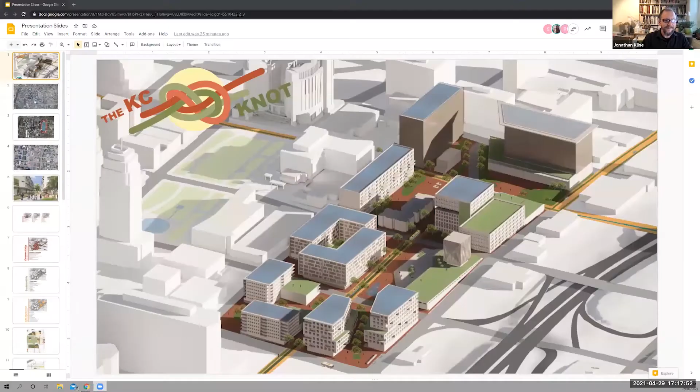As Jonathan and Valentina mentioned, on January 11th, the first day of the 2-week competition period, we attended a kickoff webinar where the competition site was announced. After the webinar concluded, we were sent a 30-page competition brief with tons of information and links about the history and current issues facing the host city, the site topography and challenges, and specific goals and deliverables for the competition. This year's ULI Hines host city was Kansas City, Missouri.

Like most American cities, Kansas City succumbed to suburbanization and white flight in the 1950s and 60s, resulting in population loss and urban sprawl. This legacy lives on as Kansas City is famously one of the least dense cities in America. Over the last 20 years, Kansas City has experienced a renaissance with a thriving arts scene, growing entrepreneurial ecosystem, and winning sports teams.

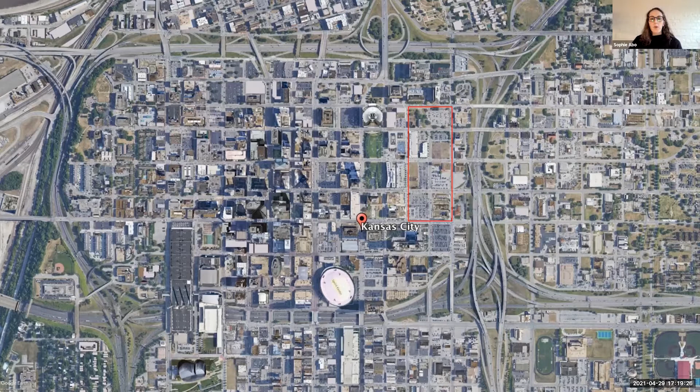Kansas City's central business district, pictured here, is surrounded by several highways, and together these highways define the downtown loop. The competition site was in the eastern part of the downtown loop, adjacent to the government center and financial districts. The neighborhood is loosely referred to as the East Village.

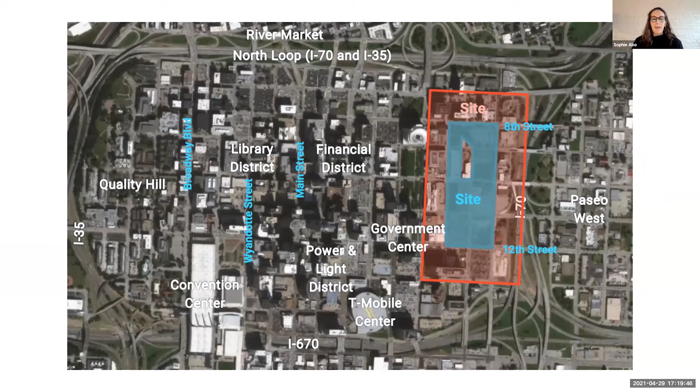The competition site consisted of 8 city blocks, or approximately 16.2 acres of land. Zooming in on the site, you can see that most of the land is currently used as surface parking lots. There's one existing apartment complex embedded in the site, but for the most part, there are very few people living in the East Village right now.

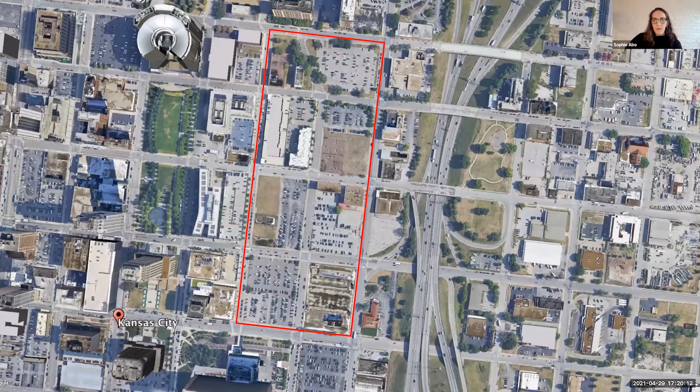The goal of the competition was to provide a comprehensive vision and proposal to transform that site into a thriving, mixed-use, mixed-income neighborhood. We were challenged to understand the social, demographic, political, and economic forces shaping Kansas City today. We had to analyze the competition site, determine a market-supported redevelopment plan, and propose an urban design scheme for the study area. We were required to create a market-feasible development program and pro forma, determine relevant subsidies, as well as a return on the entire project.

This year, ULI judges were looking for proposals that would catalyze regional and local economic impacts, increase sustainability and resilience, consider issues of equity and housing affordability, and challenge current assumptions about parking and automobile-oriented development.

As a team, we dove into that dense competition brief and other resources to understand the history and context of the site in Kansas City. We identified industry clusters, gaps in housing and business services, strategic partners, and market feasible concepts.

During our research, we identified a demonstrated need for wet lab office space in the city. We also found that demand for wet lab office space is projected to continue to grow after the pandemic. So building off of this unique real estate need and Kansas City's agricultural history and further site analysis, we centered our project concept on 3 central pillars: connectivity, transit-oriented community, and then life sciences, past, present, and future.

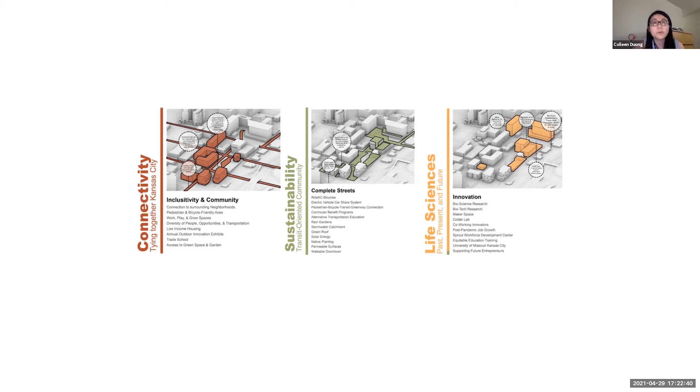The first pillar is connectivity. As mentioned, the study area is an urban island that is surrounded by multi-lane highways that separate distinct neighborhoods and communities in Kansas City from its urban core.

The KC Knot seeks to create connections between the East Village, Paseo West, Columbus Heights, Downtown, and East Crossroads and Hospital Hill neighborhoods to help mend this fractured urban fabric that was created through automobile-oriented redevelopment and redlining over the years.

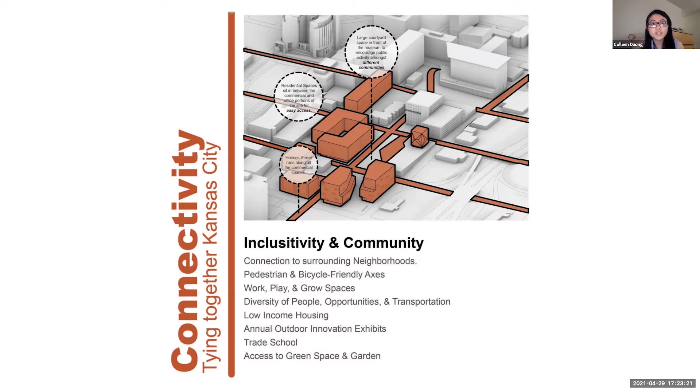This idea is tied together by a series of pedestrian and bicycle-friendly axes and mixed-income housing to create a vibrant common ground for the communities of Kansas City to live, work, play, and grow together as one.

The second pillar is creating a sustainable transit-oriented community. Across the street to the south of our site is the newly constructed East Village Transit Center that begins to encourage the use of public transportation through the city.

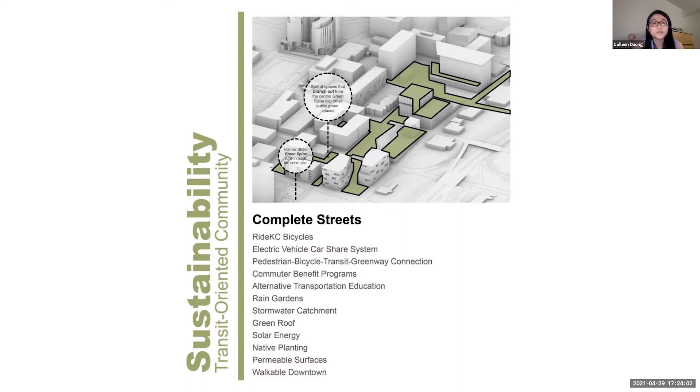The KC Knot challenges historical automobile-centric norms through a new transit-oriented design and development. We plan to limit underground automobile parking to incentivize visitors, employees, and residents to choose alternative modes of transportation when traveling to and from the site. With this idea, we plan to design a pedestrian and cyclist pathway to encourage an alternate mode of transportation outside of automobile use. The third and last pillar is a focus on life sciences.

Kansas City has a history of acting as America's AG Tech and animal health corridor with a focus on life science innovation. We hope to enhance this strong history with life sciences by creating new job opportunities, especially with post-pandemic job growth, in partnership with existing organizations in Kansas City, such as the Sprout Workforce Development Center, to create these new opportunities and train residents from neighboring communities in these new roles, and with the University of Missouri, Kansas City's Office of Technology Commercialization to support university-affiliated entrepreneurs and academics in this field of research.

With these ideas, the KC Knot hopes to act as a life science cluster to support economic transformation and equitable learning and job growth opportunities. These are the three pillars that we focused on when we began to design and organize our project development, which Doris will be talking about now.

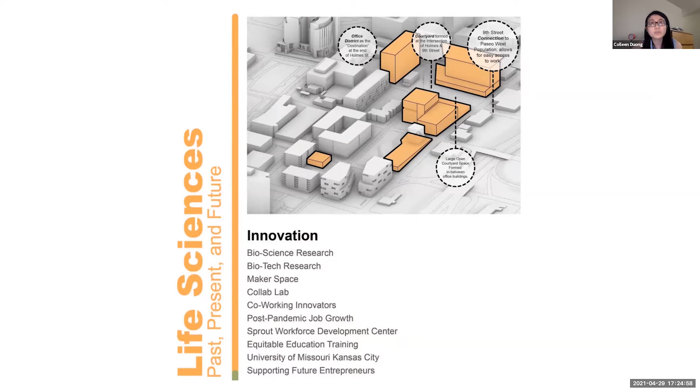The study area is currently an urban island surrounded by multi-lane highways that separate distinct neighborhoods and communities of Kansas City from its urban core. Kansas City's historical policies and past urban planning have created fractured urban fabric through automobile-oriented development and redlining.

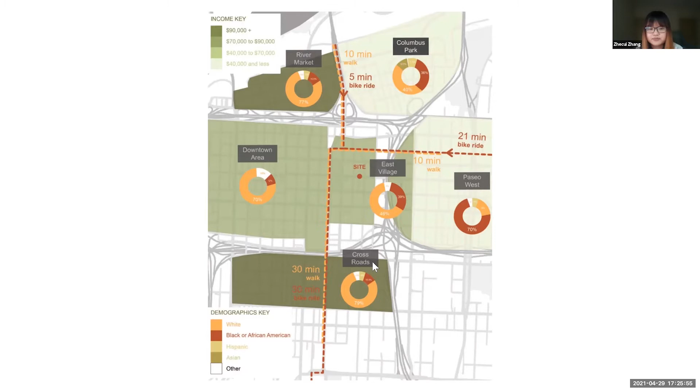The donut shows the composition of the population. We found that Columbus and Paseo West neighborhood have very different demographic characteristics and income levels compared to the neighborhoods to the west side. These two neighborhoods have a higher percentage of African American residents and the income level is lower. Our site sits in between the more wealthy neighborhoods and the lower income neighborhoods, which could potentially tie those two neighborhoods with different characteristics together.

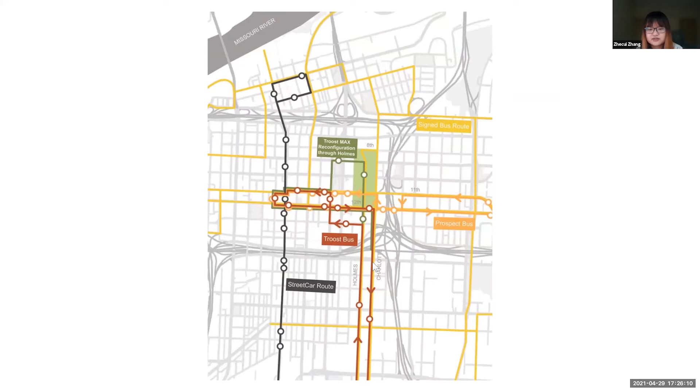There are multiple lines of public transit connecting our site to surrounding neighborhoods. There is also a new bus center to the south of the site. They are quite underused for now, but we see it as an opportunity for transit-oriented development.

When beginning our design, we started by studying the surrounding sites and gaining an impression of the community of these sites and the feeling of them so that we wouldn't design a development that was completely foreign to the surrounding neighborhoods. For example, when studying the downtown area, which is directly to our site, we noticed that it was a dense urban development with a large population of largely younger residents that were potentially in the tech industry.

And while studying Paseo West, the neighborhood directly to the east of our site across the highway, we noticed that it was a low density urban outskirt with large families that had little income. We wanted to design a development that transitioned from a highly dense neighborhood to the low dense neighborhood, offering opportunities for both communities.

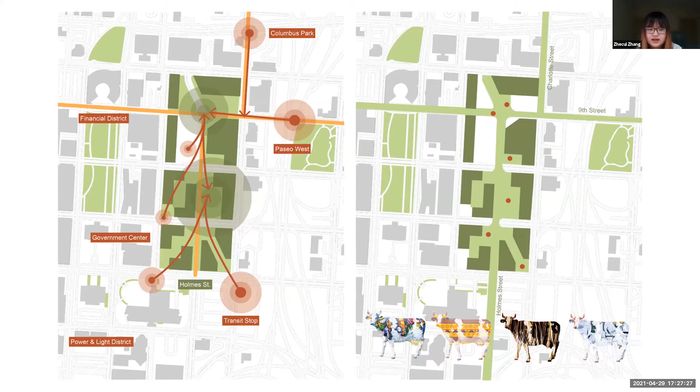The KC Knot seeks to create better connection to the surrounding neighborhoods. Majority of the people would come to the site from Paseo West neighborhood and the new transit center, along with other entry points to the KC Knot. Those entrances generate two major points of interaction, and that's where the main public spaces of the project will be.

There is a series of public spaces in front of the buildings, creating a green spine connecting the sites, and a series of cow statues will be placed along the green spine to capture the history of Kansas City. 9th Street, Holmes Street, and Charlotte Street are the main axes of the site.

Those three streets will be renovated to challenge historical automobile-centric norms through pedestrian and cyclist-friendly as well as transit-oriented design development. The Holmes Greenway runs along the spine of the KC Knot, connecting historically disenfranchised eastern neighborhoods with job opportunities via the 9th and Charlotte Street bike arterials.

The entrance to the KC Knot sits diagonally from the new transit center and hosts a multimodal hub with RideKC bicycles and a drop-off zone for transportation network companies.

When we were designing this, we brainstormed what kinds of people would actually use and come to this development. The photos to the left of the site plan are the types of people we wanted to attract to the KC Knot. For example, people from Paseo West will come to business incubators to work towards opening up their own shops, or come to the Workforce Development Center for job training.

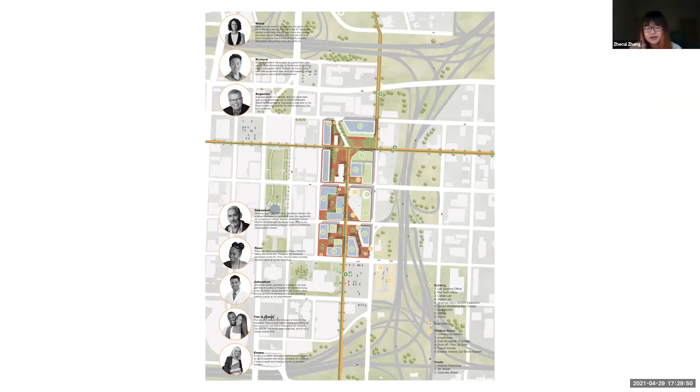As Doris mentioned, a major part of our project was the development of a greenway along Holmes Street, which created a vital network connecting East Village to the adjacent neighborhood of Crossroads over the 670 highway.

This is what we refer to as the green spine of our project that connects the multiple green spaces branching off of Holmes Street. The following slide showcases a study of how to adjust the existing street dimensions to accommodate cyclists, allow for public transit access, and give generous amounts of space to pedestrians.

The green spine is a carless street that promotes sustainable transit and allows the freedom for more pedestrian movement.

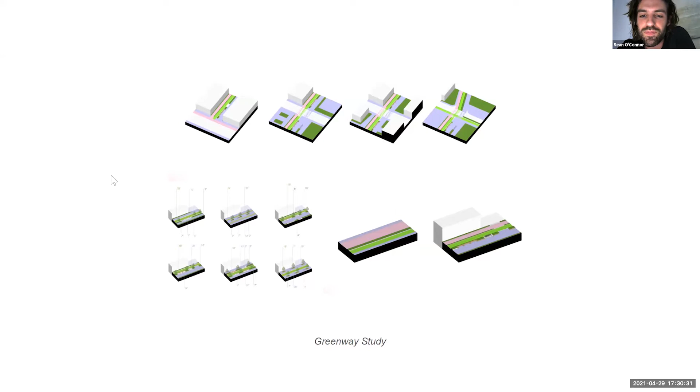The results of our study create a promenade for pedestrians and cyclists while allowing for bus access. We expanded the sidewalk 6 feet on the west side and 18 feet on the east side to welcome the circulation of pedestrians. A two-way bike lane stretches across the street and links with 9th Street, leading to an axis linking Paseo West and downtown.

And Charlotte Street, which links to the adjacent neighborhood of Columbus Park. The Greenway's bus lane connects with existing bus schedules, easily connecting it to the rest of the city.

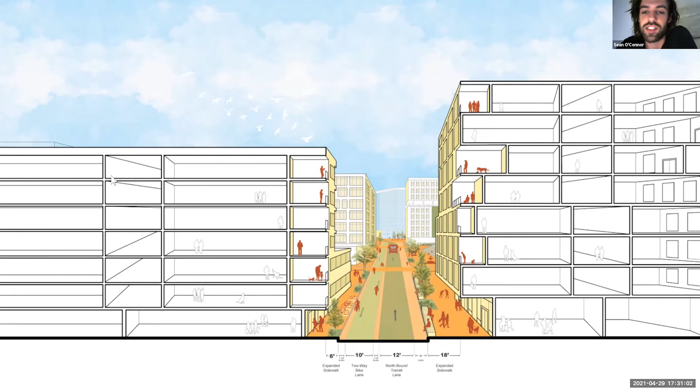The green spine forms an anchor drawing in pedestrians and cyclists through the permeability of the building's form, which creates a connected network of green public spaces.

In addition to the green spaces on the ground level, the site also features more privatized green roofs, which expand upon the existing green space.

Green roofs simultaneously allow for relief from the urban heat island effect, an issue with the undeveloped East Village from the plethora of paved parking lots. Those roofs that are not utilized for green space host solar panels that provide localized energy to the development.

In order to bring the large green spaces and sustainability themes to the community level, a rain garden on Holmes and 10th Street adds educational opportunities about stormwater management and agriculture.

The rain garden also bolsters community ownership by acting as an interstitial space for community members to bond over building and maintaining something together.

In addition to the rain garden, 10th and Holmes host the museum, whose form creates a public installation in and of itself.

The large block on top of the plinth-like ground level building creates a visual focal point, drawing residents to the large public staircase and swath of green space.

The following section goes into deeper detail specifying the museum's program as well as the various programs for buildings on the east side of the site featuring different sustainable systems.

Starting on the south or left side of the section, the existing transit center is greeted by exterior short-term bike parking with interior long-term bike parking inside the building, encouraging bike-oriented transit.

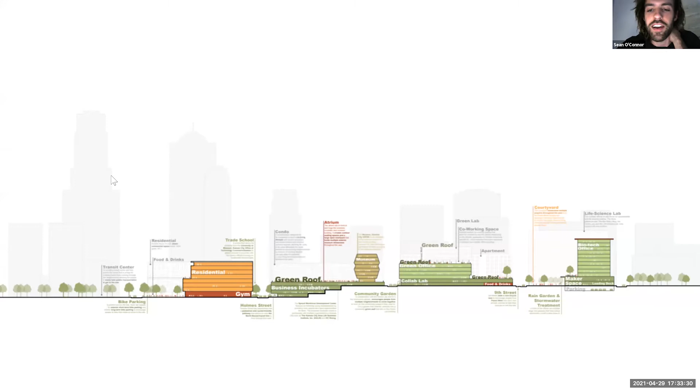When we considered the phasing of our project, we had to trade off between making it financially sustainable as well as creating more density in the community and attracting people to come work there as well as stay there. After much discussion, we decided to prioritize developing the community in order to create density within the neighborhood.

First, we focused on building our office spaces. We felt this would bring in employees who work in life sciences, biotechnology, as well as green technology. To supplement this, we also wanted to develop a small amount of residential space for employees in these offices who wanted to live close to where they work. In addition, there was also a little bit of retail and gym space developed to supplement the office space.

A good portion, in fact a majority, of our parking was going to be developed in phase one because we felt that the people using the office space would also require car parking. In phase two, we moved on from building enterprise and wanted to start building a community around this theme.

Around the office space and the density we attracted, we felt that after a few years the site would become a popular area in Kansas City, creating increased demand for our residential apartments and allowing us to generate higher revenues in terms of rent. Therefore, most of the construction in this phase is residential space.

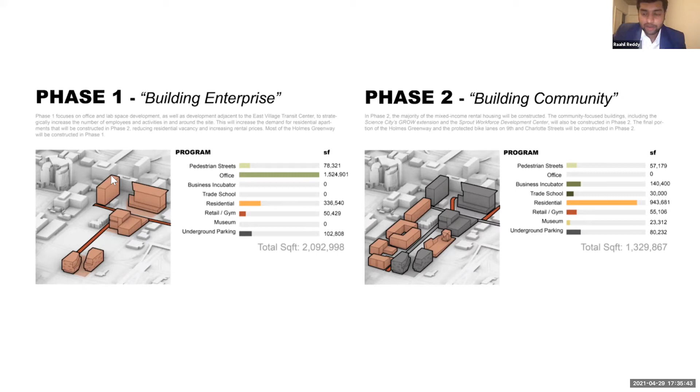Despite providing some key socially oriented facilities as well as community development facilities, we achieved an unlevered IRR of 12% and a levered IRR of 23%.

There were many key companies as well as other institutions that we sought to partner with and collaborate with in order to make this project feasible, efficient, and effective. For instance, for our trade school, we wanted to partner up with the University of Missouri, Kansas City to help them develop a presence in the downtown.

We also wanted to ensure that the University of Missouri, Kansas City could provide good employment training to many people in and around our community. In order to improve our mobility, we wanted to partner up with Bike Walk KC to create a good platform for people to ride their bikes as well as use some of the other bike rental features.

For our business incubator, we wanted to partner up with some of Kansas City's as well as America's famous incubators, such as KC SourceLink and KC Rising. We felt these organizations would provide good opportunities for mentorship for the community, for the people working there, for any group seeking to develop their businesses, and for a whole set of entrepreneurs.

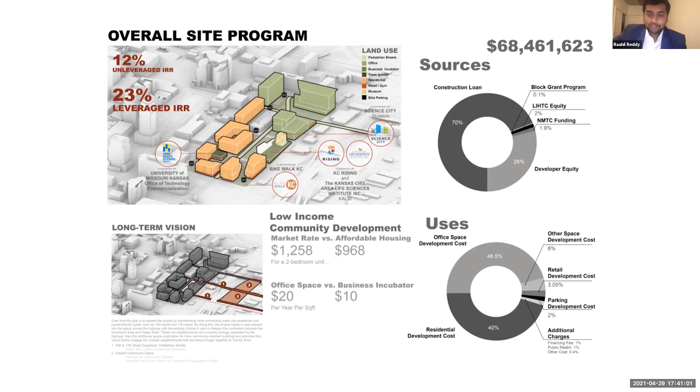So this is just one image of what we want our community to look like: there is great mobility, good density, and a community centered around life sciences.

We named our project the KC Knot because we wanted to tie together communities from across Kansas City. We wanted to break the barriers that have segregated the community racially, and provide everyone an opportunity to learn and succeed while honoring Kansas City's agricultural roots. Thank you so much, and we're happy to take any questions you might have.

Great job, guys. Thank you so much.